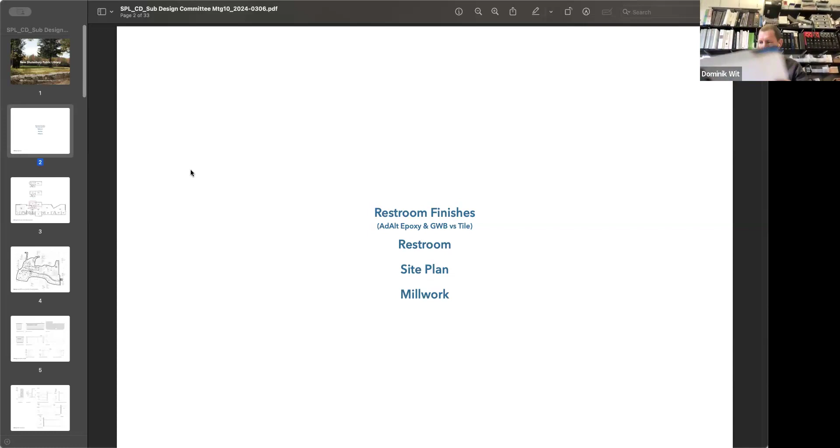Mary Anne, you can come see it in my bathroom. Okay. It'll be a little bit difficult to see, but they've got nice color options. You can do a mosaic.

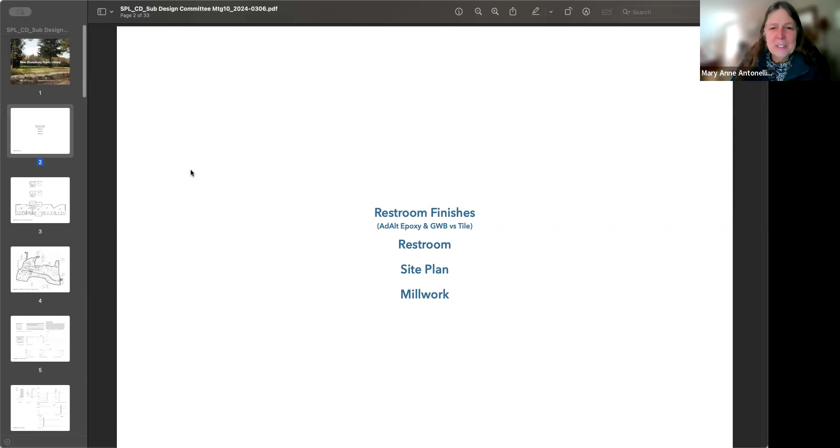We've specified this in our office for many years, and it has always been the most cost-effective tile that we get on the job. So as far as public bid, the Daltile will always be the first choice for any tile sub.

So we stand behind it. I just wonder, for the cost estimate, do we just look at the 75% and have the add alts? We can make our decision then. I think this ties into whether we need another committee meeting prior to the 75%, maybe next week. I had asked for a vote on what the final finish is, but maybe we just wait for the 75%. A few hands have been raised.

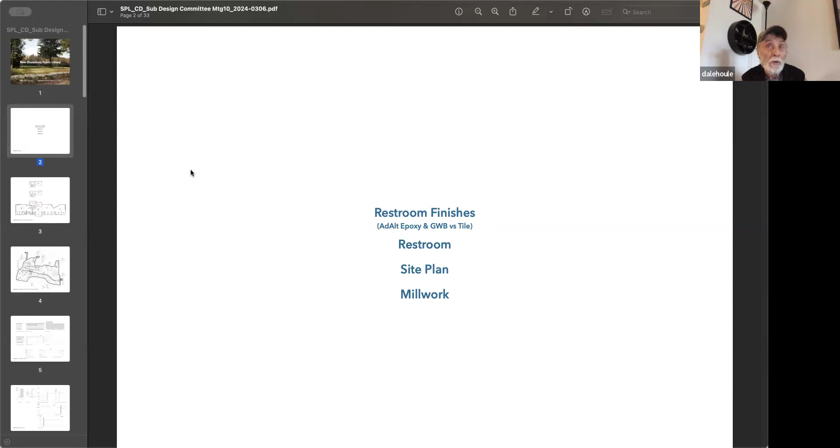I think in order, Dale, you might be first. So I would think that Daltile is sort of a middle ground, and in terms of estimation, the tile approach would be a good middle ground, because you can go up on the tile. I agree, I don't think we really want a bare concrete floor, nor do I think we really want a high grade painted wall, if we can possibly do better.

Penny? What size tile are you specifying? I'm just thinking of grout and how dirty grout gets, especially in bathrooms. Yeah, absolutely. So they have 2x4. My initial sense was to go with 1x1, a true mosaic size. But to your point about grout, you're right, the more grout you have in the floor...

I think it all comes down to cleaning and keeping it clean. We have maintenance issues in town, so I'm thinking of what will look the most presentable over time with minimal maintenance. Does the tile come in a larger size, like a 4x4? Not that I know from our samples, but I'll definitely look into it. My sense is they're smaller format, and as you get into larger sizes you start bridging that middle ground on cost.

Well, I'd go for as large as you can get away with. Okay, so let me look at that. If we use 2x4, I'll ask around the office too about long-term performance. From my knowledge we haven't seen any issues with that, but I think it's a valid question, Penny.

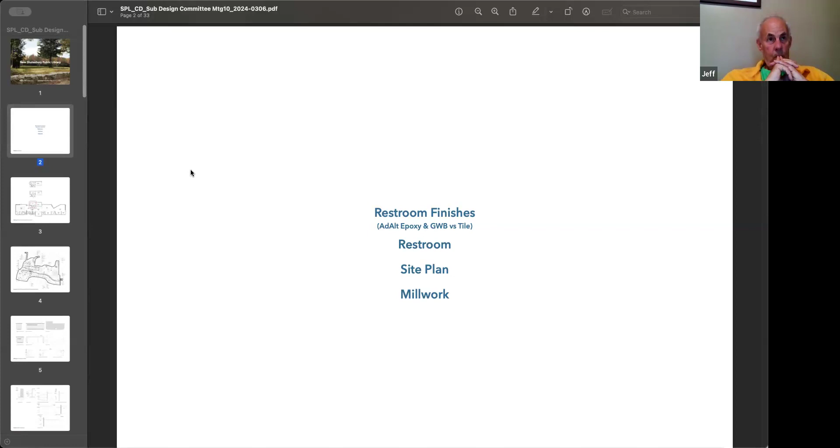I agree with the tile approach. Okay, I think Dale is correct. Yeah, me too, I agree. And just to be clear, have you completely dismissed tile in the entry and circulation area? Because I would still like to see that as an add alt.

I feel like it's something we would be happier with for the long haul, and I have a hard time saving money just for the sake of saving money. I know it's more, and I know my voice here is unpopular, but I prefer not to totally exclude that at this point. I think there's room in the 75% to still leave that door open, and we just reevaluate the numbers.

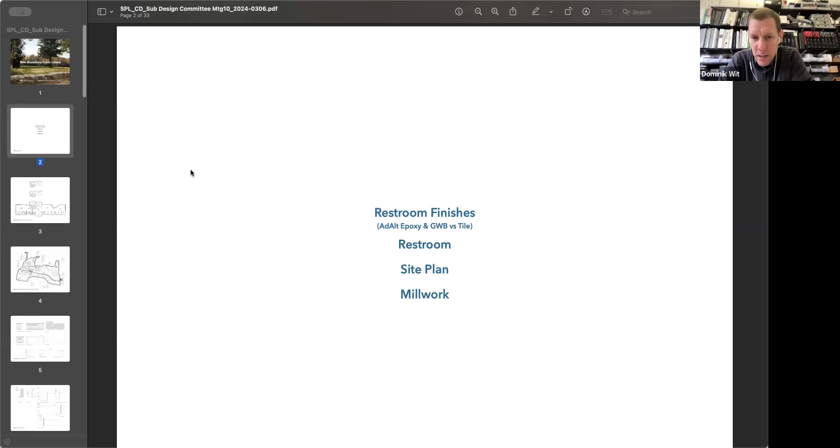I don't know about the high traffic area, where the smaller format is really what we would want to do. So let me do a bit of discussion in our office and see what's best. We'll definitely hold something for that common space that was previously set as tile, and see what we can use for that. Thank you.

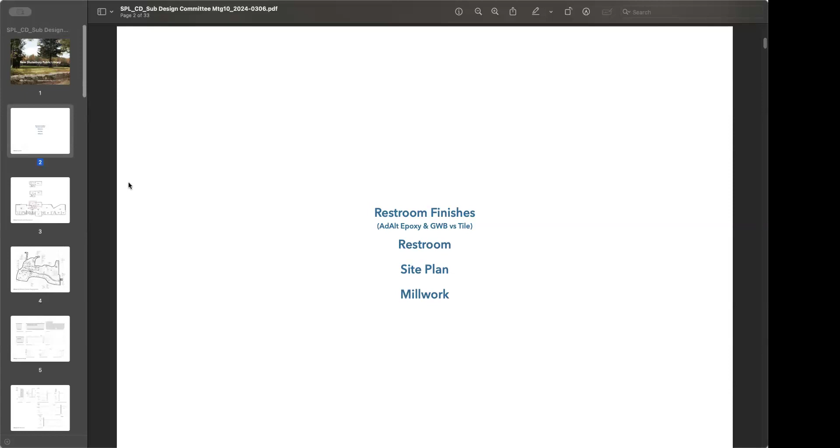So that was just a talking point, I wanted to touch on that. I'd like to update you on the restroom. Last time we spoke, I had an outstanding question with our plumbing engineer as to what we might need for water service square footage to handle a lower flow rate at the well. Originally the plumbing engineer had asked for 25 gallons per hour, and we've dropped that to 0.75 gallons.

Per hour? No, that's not right. I forget that number now, it's not on top of my head. I remember we had reduced that to 0.75 per minute. Yeah, that's what it was. So, 25 gallons per minute, now that I say it, just sounds outrageous. How we ever held on to that, I'm not sure.

So, apologies. The plumbing engineer got back to us, and they are going to have some preliminary containment to be able to store some water in this water service room. That's all to say that at 0.75 gallons per minute, we do not need additional square footage in the water service room, which is great as far as how we lay out this additional restroom.

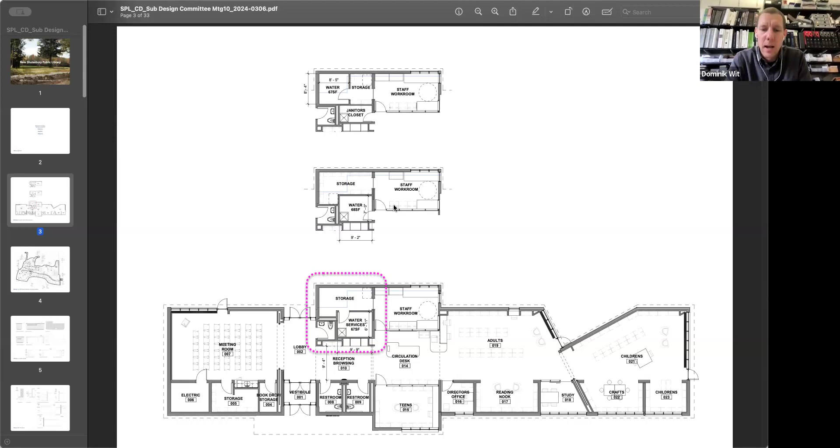With that in mind, these layouts incorporate a roof footprint of 4,999 square feet. So depending on how things go, there's a little bit of fluff in that number, as to where I end up delineating the edge of the upturned roof, or how many inches is the overhang now on the north and south sides of the gabled roof.

We've been in discussions with Garland about all of this, so I'll update you on our strategy for gutters. We're keen to get away from a total gutter strategy. We'd like to reduce the gutters to just where we need them, considering maintenance.

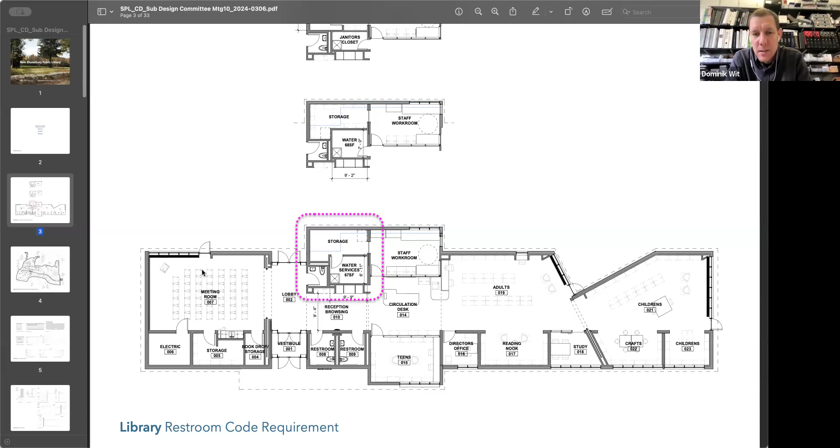But before we get into that, I just wanted to go over again the 3 layouts that we've been contemplating. This first strategy has the restroom with the fixtures nested to the western wall, which was not favored because of the use of this restroom related to the meeting room and potential views into the space.

So there's privacy considerations here, but this could be flipped. Similar to the version above, but it puts the water service room inboard and gives you a nice storage room as shown here. The staff workroom is kept as previously designed. This blue line again was the existing footprint, and you can see the staff workroom layout is the same and it has grown a little bit in area. So I'll go through all 3 and then we can come back to them.

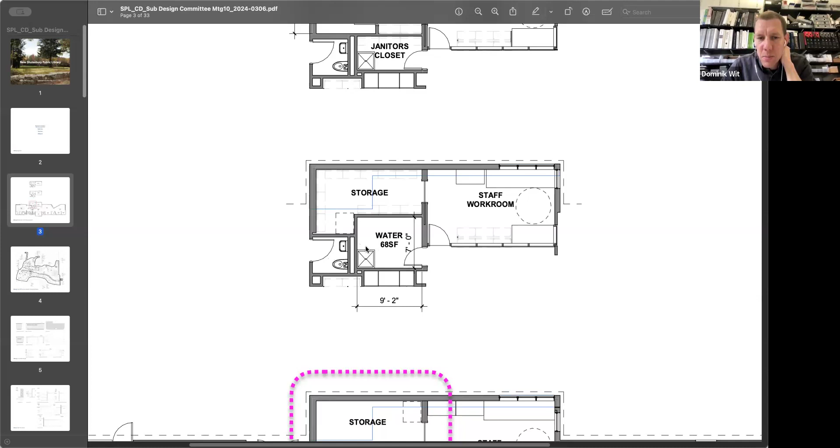Again, this second version is tweaked a little bit. The fixtures are mounted to the northern wall with a wet wall division between water service and the restroom, that allows your mop sink to be hosted here. So it's basically taking this version but flipping that restroom.

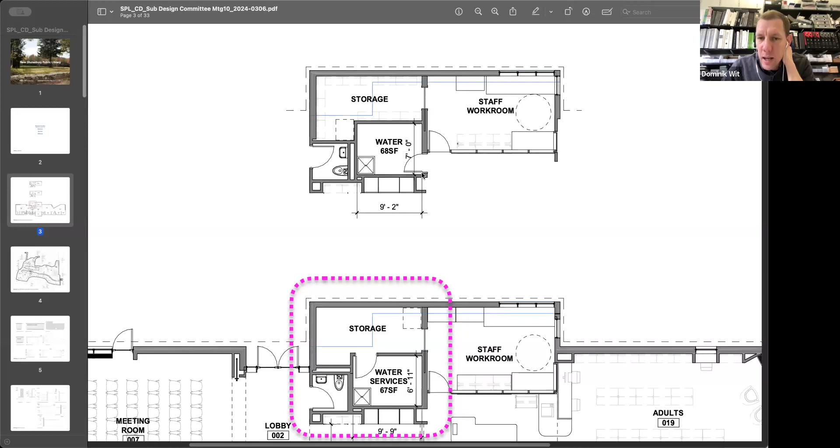Slight dimensional changes here. What we are doing as well is trying to squeeze in direct access into the water service room. So this layout has basically pushed the staff workroom wall and door further west. You can see here, this is a 5-foot ADA radius that we need in this room as a minimum. So we are basically taking this wall and shifting it into the staff workroom.

And that allows us to squeeze a 30-inch wide door into the water service room. I like this as far as direct access to the mop sink. What I'm still trying to get information back from our plumber is, can we have a 30-inch wide door? My sense is we may not, so we're investigating how this scheme could potentially work if we do need a full-width door.

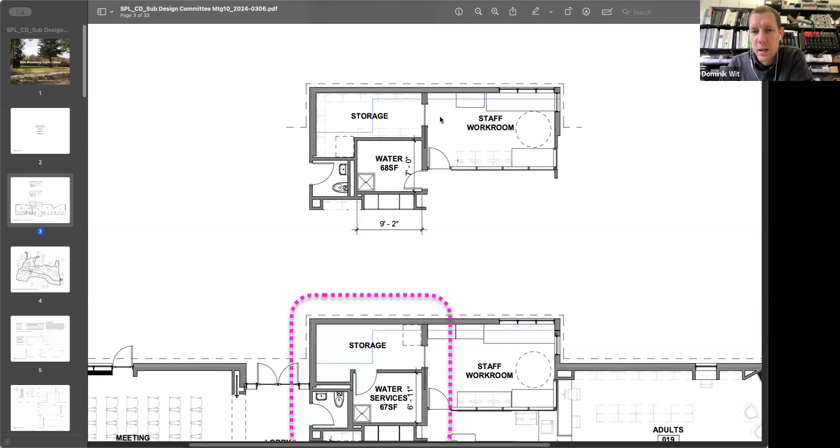What we've done here as well is the pocket door is centered to the storage room so that you can have shelving on both sides to maximize your storage potential. But that now is constraining what you can do for a cabinet. This is a 2-foot deep storage cabinet, which you would only have about 12 to 18 inches here, so it kind of constrains what we're doing. If we had to go this route, we'd still consider how the staff workroom lays out. So that led us to option 3.

If the water service room was to go adjacent to this new restroom, do we divide the storage room into a janitor's closet and additional overflow storage, with the storage room having direct access into the staff workroom? This has a 30-inch wide door going into the janitor closet. It reduces the storage room itself, but you could use the janitor closet for additional storage depending.

The alternative option is that we notch the entry door into the staff workroom so that this door and the glazed wall condition actually turn in. This pushes the door in and allows us to increase the water service room door, returning it to a 36-inch door width. This door could push in, and we can consider how the staff workroom lays out. So that's kind of where we stand at the moment.

Heather, I see you have your hand up.

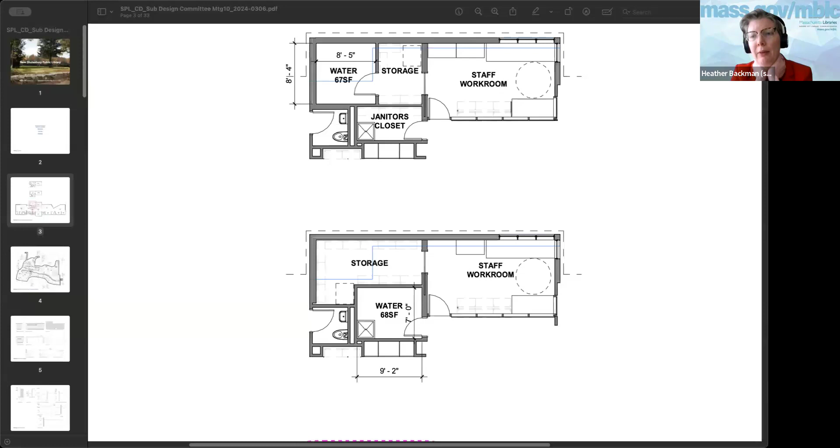Thank you for all your work thinking and rethinking this, it's a lot of moving parts. I think the middle option is the best one if you can get it to work. I do have concerns about the top option and the amount of storage lost there functionally. Maybe some shelves could go in the janitor's closet, but from having worked in libraries, that's not going to be a functional solution in terms of really using that space. If we can stay away from options that reduce the storage closet to that extent, that would probably benefit library staff in the long run.

That makes sense. As you say that, Heather, I wanted to show you this—somehow it wasn't representing in my presentation what I'd hoped to show for option 2 that you favored. This incorporates pushing the entry door into the staff workroom. If we could make this work here, that looks much better. It looks like all you're losing is potentially just walkway space, not necessarily losing functional staff workroom space.

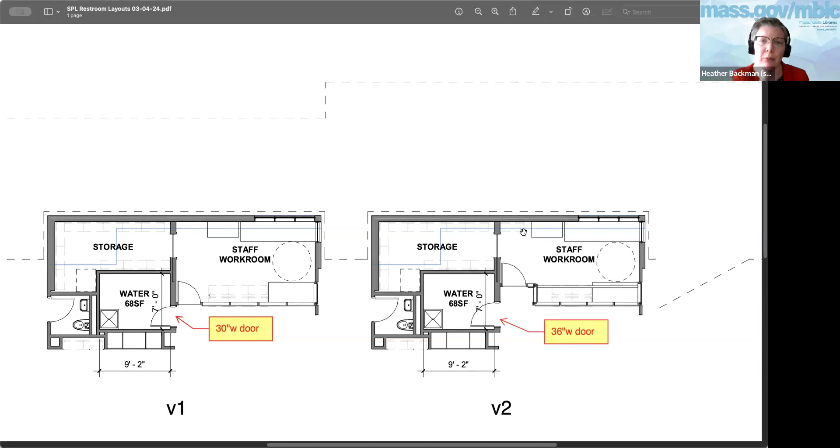That's right. It depends on the fact that we are not going to own the scope of this storage cabinet closet, so it's going to be a standalone FF&E component, something the library procures. What is available at this depth has to be considered, and we'd like to incorporate that thinking into how this might resolve.

But also, I think the other component here is we need 40 inches clear from this wall for ADA, right? So that meant this glazed portion of the wall needs to push into what we already had as shelving. This was 9 feet of shelving, and I think that would be reduced here if we incorporate that.

So a small reduction, I think, for you, Marianne—this is double-sided. To the circulation space, you have holds, and staff circulation storage. Your holds is actually here, but then in your staff workroom you have dedicated shelving. This is counter height, so about 30 inches of metal shelving in here. This one has the best potential, I think.

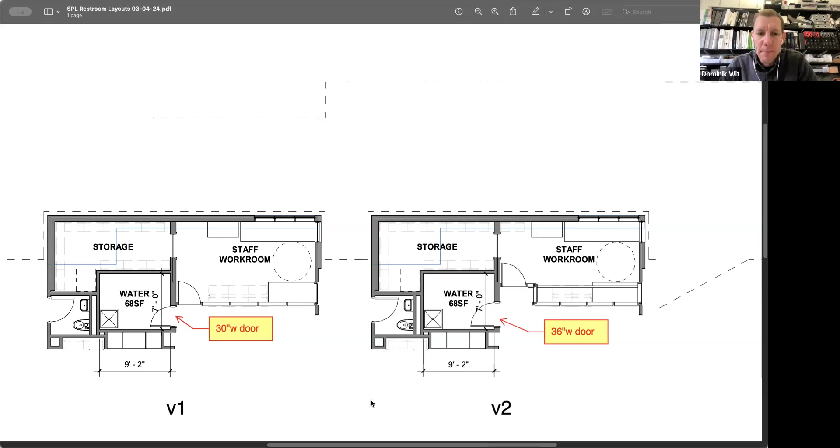So a quick sense from the group as to whether version 2 of option 2 seems to be the best strategy, depending on whether we can get away with a 30-inch door width. That would be great, I think it's just cleaner.

Practically speaking, based on my experience, the 30-inch door would work unless there's some equipment going into that room that wouldn't fit in or out. But in terms of basic operations, getting to the mop sink and doing all those functions, I think that's good, because no matter what, the right-hand option is going to cost more money. As soon as you put those two corners in there, that's going to cost more.

So if there's some reason we can't work with a 30-inch door, we'd have to factor that in. But if we can, in terms of cost for the 75%, I'd suggest you go with the V1 option.

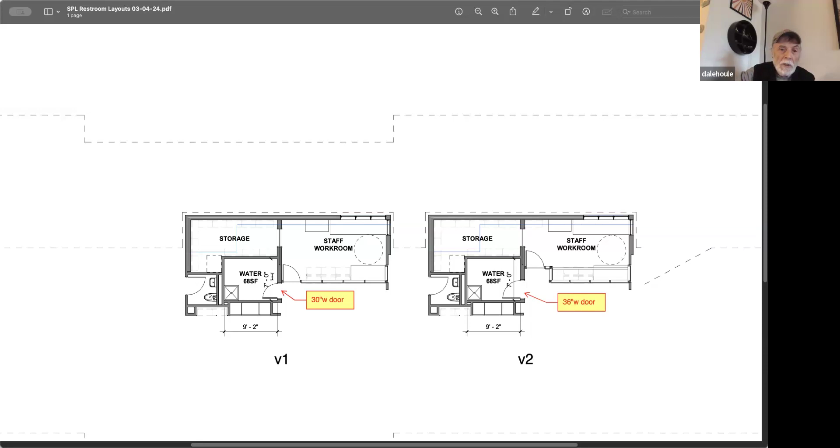Understood, thanks. Marianne, what is the dimension of that little cabinet space, the width? I think this is at least 8 feet for the whole width. So is the little rectangle you drew 4 feet? Yes.

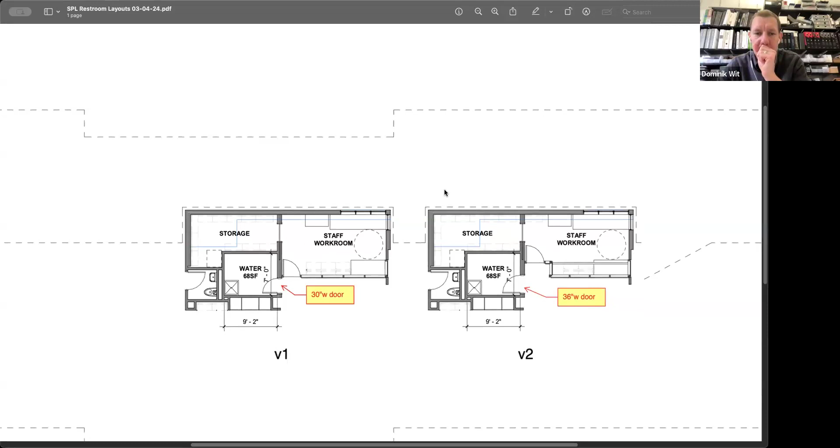Okay, can you show the one that's in the plan? Can you put that up on the screen one more time? Down lower. Okay.

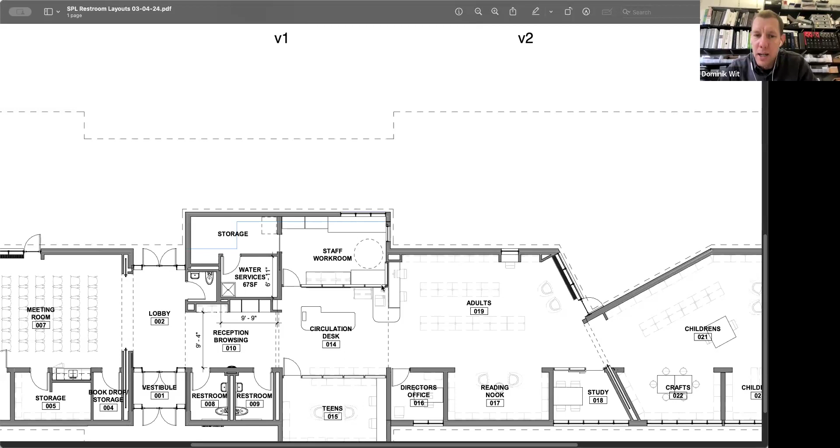I think as well, which I'm not representing in this version 1 or 2, is that if this wall and all of this assembly moves in, you actually open up some space here. And the question is, do we pull the circ desk in a little bit? There's quite a pinch point here. But it does open this up a little for you as well, and maybe this printer station can extend a little more too. So it would require a little fine tuning once we get there. Right now we're at somewhat of a placeholder.

I think if we use this as a placeholder for now until March 15th, whenever we're testing, it might actually be after our 75%, but we'll have some time before we go to the 100 to tweak these things. As far as structure and the building footprint are concerned, we're holding to this.

Okay, good. Alright. I think if V1 can work, that looks about the best. And if V1 doesn't work, I think V2 will work.

You have that line drawn in V2 from right there, and that's not in the other one. That's an error on our part, that was a quick output. That's a part of the model that moved across with that move. It needs to be cleaned up because it makes the room look a lot smaller. It does, yeah.

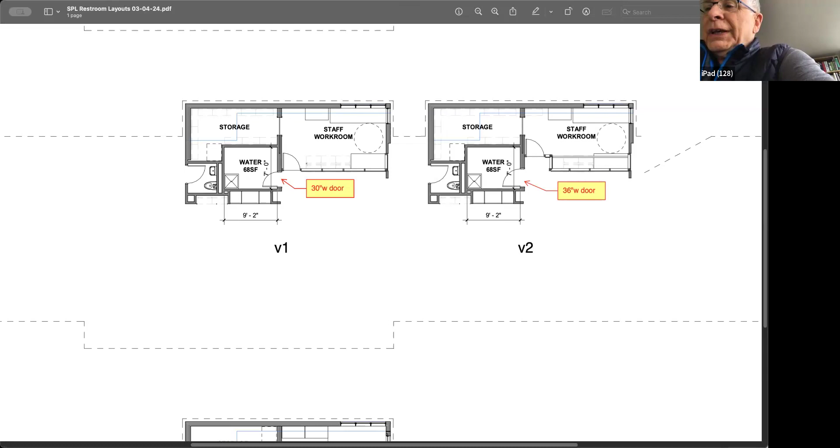Because I was thinking, if the yield is adequate, I'm thinking you need your pressure tank, and then I would assume we're going to end up having to have a PFAS filter, because neighboring wells currently have them or need them. The highway department across the street has one, and houses to the east on Pelham Hill Road have them. So we would need the PFAS filter as well as a pressure tank, which together don't take up a whole lot of footprint. So I was wondering if that's all we need, do we even need that much space?

We do, and I think the mop sink is obviously taking up square footage too. The pressure tanks we are already accounting for in this square footage, so we have that. If you have a look at the DD set of the water service room, you see a layout of the equipment. The thing that needs to be considered is the maintenance clearances for these items, and that has a bearing on the resulting square footage.

The PFAS, I think we should account for in next week's pricing set. Just get that square footage accounted for in this water service, considering neighboring properties need it. For some reason, if we don't, we can just give that square footage back over to storage room. I agree with that, yeah.

We should then also include it in the cost estimate and just have it, and again we know where we stand.

Andrea, I see your hand up. Thank you, and I apologize, I was on 128, so I have a couple of comments that I didn't want to hop in on and have all of the highway noise in the back. So starting with this, I just want to make sure a 30-inch wide door would satisfy a wheelchair if needed.

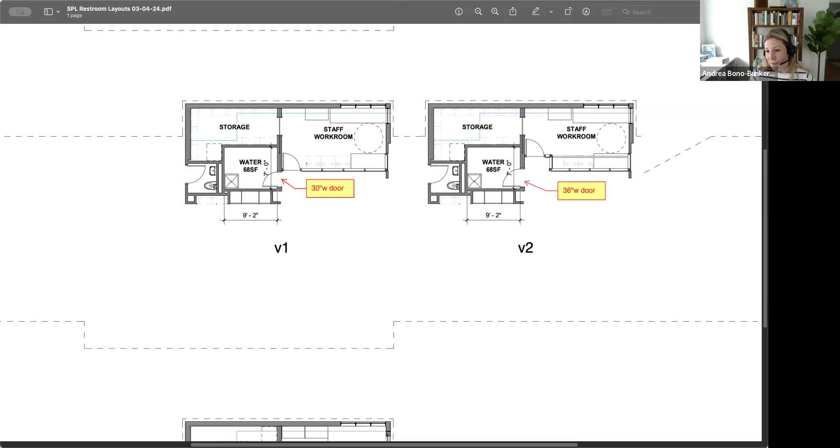And then also when you're thinking about the costs, I just want to put a reminder out there that this is a pilot project for us that is supposed to be the most economical as it possibly can be, because what we're trying to do is prove that this can be done for small communities like yours. So I understand that there are some aesthetic choices that we are not part of, but I just wanted to remind everyone about that when you're making these decisions, how replicable is this for other libraries that are similar. So thank you. Great, thanks, Andrea.

So I think there's small tweaks to this layout that I will go ahead and do and include in the 75%, and that way we have it. As far as decision making with regards to this, I'll focus on V1 and see how things lay out, but potentially V2 if needed, so I'll keep you in the loop as how things go.

Marianne, this storage cabinet, I think I need to consider as well as how this ends up resolving, so we can coordinate on that. Yeah.

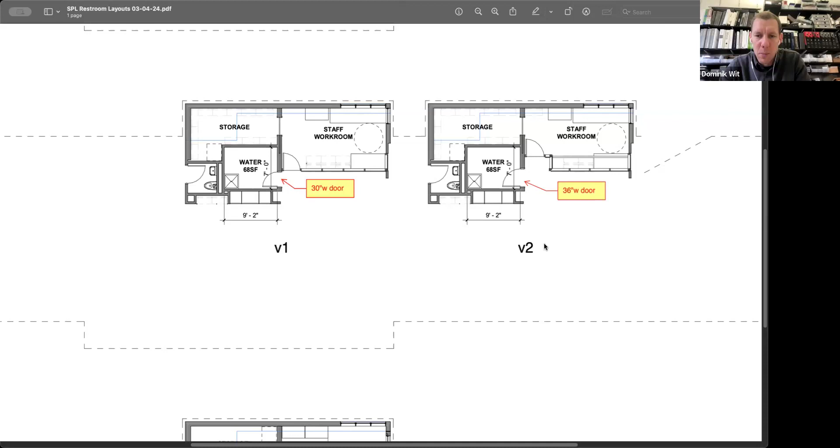That was the interior. Paula, I don't know if she's on the call actually, but she had quickly outputted some views for us.

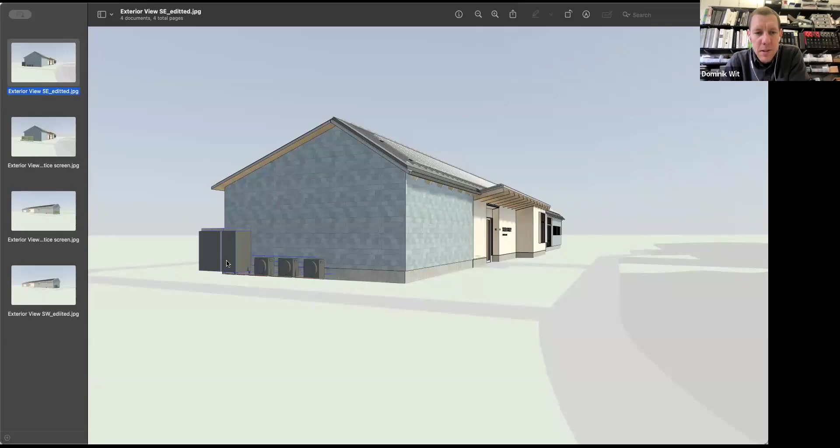So this is a view of the southeast corner of the building. And what I wanted to show here was the mechanical equipment. This is now the meeting room and the electrical room. This is the condensing units and all the mechanical equipment that we're housing to the south of this building.

The refrigerant lines have been coordinated so that they enter the building down low here at the water table, and they're not going to fasten to the slate at all.

Yes, this equipment is fairly visible, right? They're fairly large, this one here stands over 6 feet, it's like 6 foot and some inches. The refrigerant lines would be behind them, and they would be sitting on a 5 foot wide concrete pad. This location right here where my cursor is is about where the meeting room door was. So you can see here from the roof ridge, it's right around there, so it takes up that space.

This wall is going to have other electrical panel boxes. We've got the solar equipment, there's also the roll-up generator access point here. So there's some equipment here that we haven't shown, but we need that clear space in front.

But we do have about 4 feet of garden bed before we get to this pathway, so we were considering how we handle that visually. There's a potential to screen that. We were talking with Stimson as to whether we use a lattice and have vines to create a natural screen element, which I think would be nice, and then you would have what we already own for shrubs in the foreground. It's a question to you as to whether we own that screen in the base bid, or whether this is something the library would like to take on after the fact.

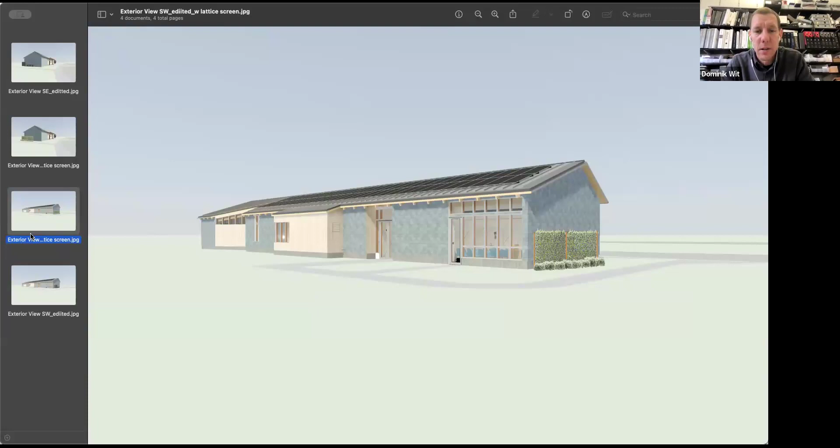But again, that might be something the library is happy to take on. This is a southwest view, and again, so you saw the screen element there, and this is what you would see.

So it's a question about how you are considering programming this space. It's not the most beautiful thing to look at, and it's not the first thing you see as you enter the library either. You wouldn't see it exiting to the west and using this portion of the site. It's only when you come around to the south that you see these.

I saw a few hands up. I see, Andrea, you're on top of my list. Thank you, yeah, so just a few questions.

So one is for maintenance and upkeep purposes. Shutesbury gets a little bit more snow than a lot of us. For removing snow around these units, would the screening impede that at all? Would it allow people to be able to get in there and work on the equipment? And does it cause any impediments to service or maintenance, I guess, is the first question.

Yeah, that's a good question. I'm still waiting to hear back from our mechanical engineer on that, so I haven't got a good answer. My sense is that we would make sure that is feasible for all of that equipment.

And the other question I have is, they are quieter units, but they're not completely quiet, and you have it next to the meeting room. So I just didn't know if there were any considerations there for how to mitigate noise transfer between that unit and the great meeting room.

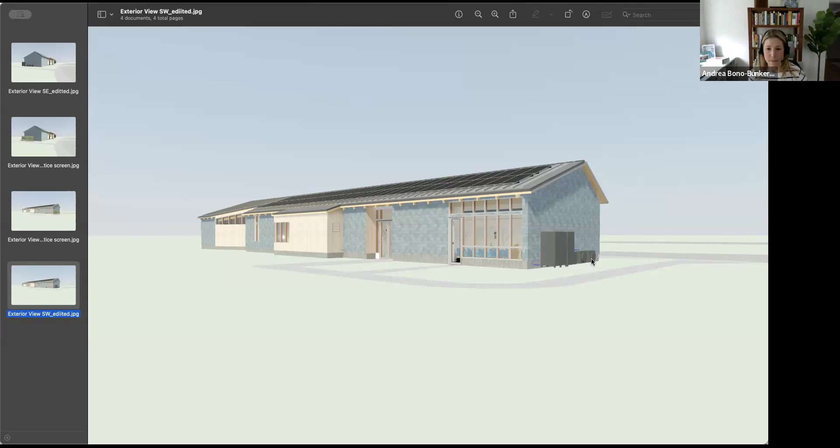So I guess I would be concerned about any panels, just simply because of the high winds that we've been having. So I'm thinking that maybe for the 75% cost run up that we maybe don't include any panels, because I think they would require maybe just a little bit more than simple engineering.

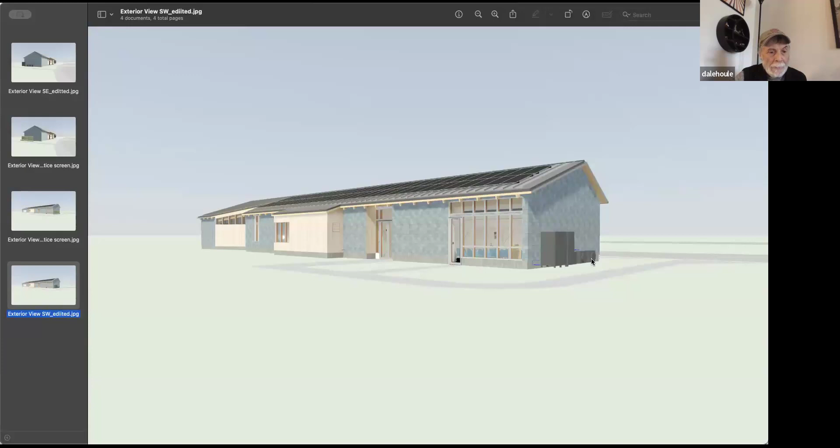Yeah, and that's where my sense was. It's a good point, Dale, that we would want to involve a footing, and make sure that our post is sound and that the lattice can hold up to storms. So we would tend to make sure this is adequately engineered to a degree, right?

I think it should be considered like a fence post. Get a decent footing in there with a solid post and allow the lattice to be attached to that. So, yeah. Penny?

Remind me, I know you mentioned this, what is the distance between the units and the pathway planted? Yeah, so it's a 9-foot span between the edge of wall and the side of the sidewalk here. The concrete pad is 5 feet of that, and then I think it runs 20 feet along the building. So you would have a 4-foot bed.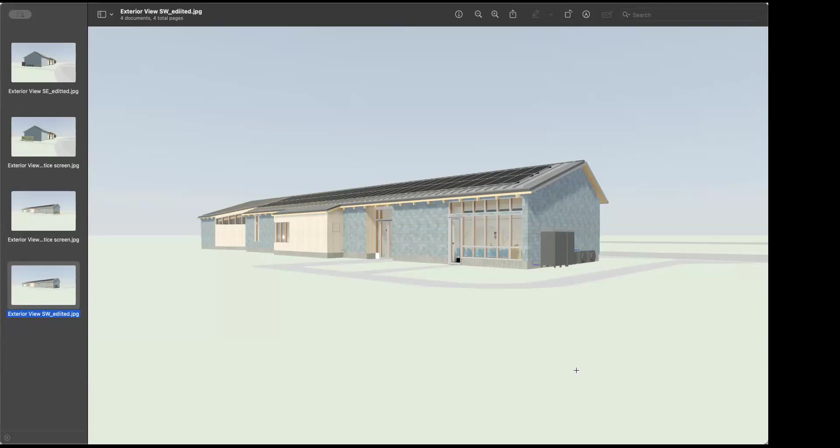So I would vote for just putting shrubs there, just putting plantings. I think that would be simpler and less expensive. And we all know what those things look like. And as Marianne said in some earlier meeting, it's just what we see now. And we celebrate them. Well, we tolerate them. We know they're good, even though they're not beautiful, but it's just what it is. So I think an assortment of well-placed shrubs that are sized so that they won't grow too close to the equipment is the way to go.

Yeah, that's a good point, Penny. That was my first thought, and I was talking to Stimson about what species we could use. The question is, how much of this equipment do we want to screen? Because these 2 units here are over 6 foot. So is 4 foot of ground space enough to contain a shrub that can grow tall enough to effectively screen it over time?

So we're not going to, and maybe it won't, and maybe it won't screen it completely. And I think that is okay. Got it. Yeah, perfect.

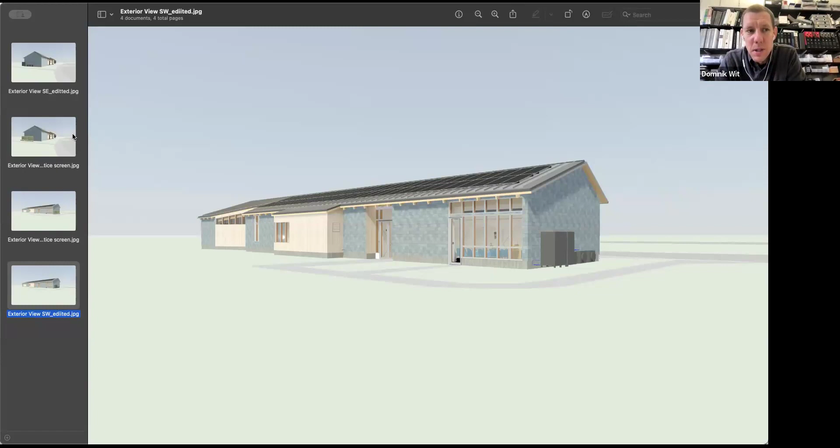So I'm happy to go. That's kind of where we are right now, actually. And Stimson owns the plantings for that bed, which is a small shrub.

We just don't hold the screen. I know this had been a topic we never got back to you on, and I wanted to make sure you all understand where we are. We've been working hard with our mechanical engineers to lay this out and make sure the refrigerant lines are as discreet as possible. It will also involve a small furred-out condition in the meeting room to allow for this refrigerant line. They actually need to enter the electrical room high, per code, because they're going to use the plenum space to connect with the equipment. So they'll route up inside this exterior wall and turn into the plenum space up high. They need to be 14 and a half feet above finished floor in the electrical room, then serve the mechanical equipment throughout. So a little bit of gymnastics, but a much cheaper option than having this in a duct bank below grade.

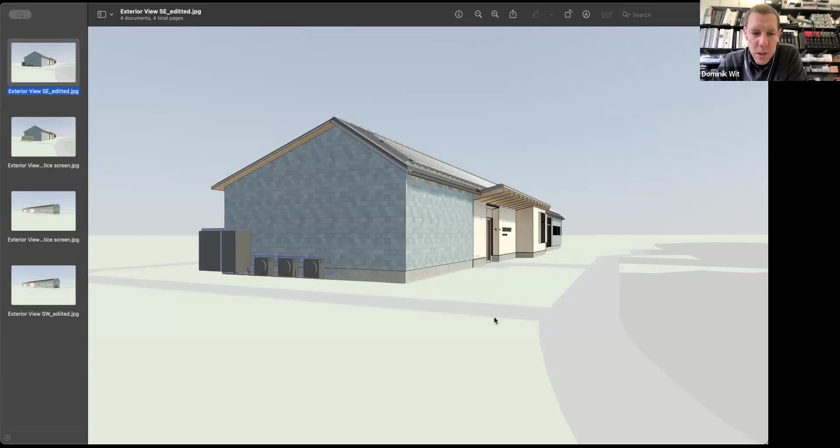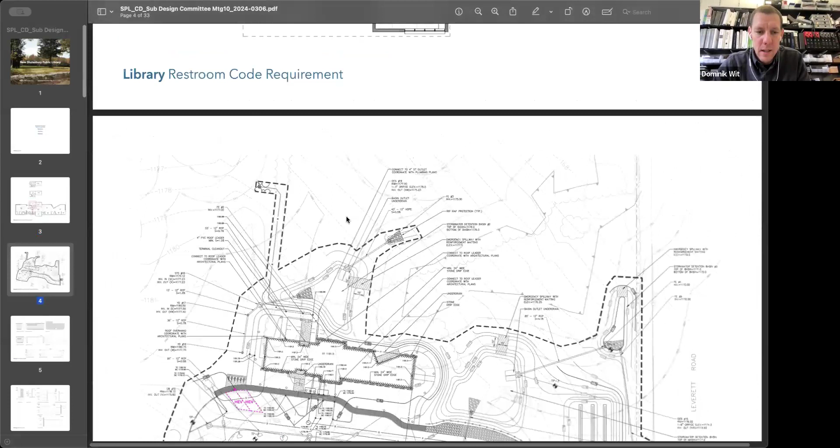So excuse the jumping around, I'll go back to the presentation. So, the site plan - I just wanted to update you. Again, a lot of coordination going on. This is the updated site plan.

Related to this, we have the NOI amendment being submitted to Conservation Commission. We're pleased to say the stormwater report did not need to be revised. The revision to slightly reorient this parking lot turnaround, so that we meet setback requirements to the neighboring property, has not altered the way stormwater is handled on site. So basically the system is operating as previously submitted to Conservation Commission. That was great news.

I wanted to mention that we do need a raised element on the boundary here, the full length of this entry drive. So we're holding on to Cape Cod berm. This is required to allow the stormwater collected on site in these locations to be controlled and make its way back to the drainage system. So we're holding that as Cape Cod berm.

I'm also coordinating with Stimson. I've asked them that we continue the Cape Cod berm condition - we need that raised element here as well. Initially we had precast concrete curb, but as a cost savings measure, I think this should go to Cape Cod as well. So just the concrete footpath has concrete curb, which is appropriate.

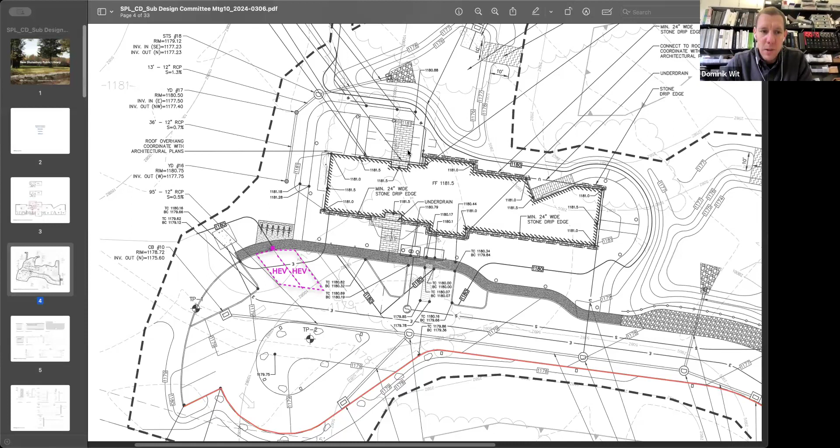If we don't have any other questions, I have millwork updates.

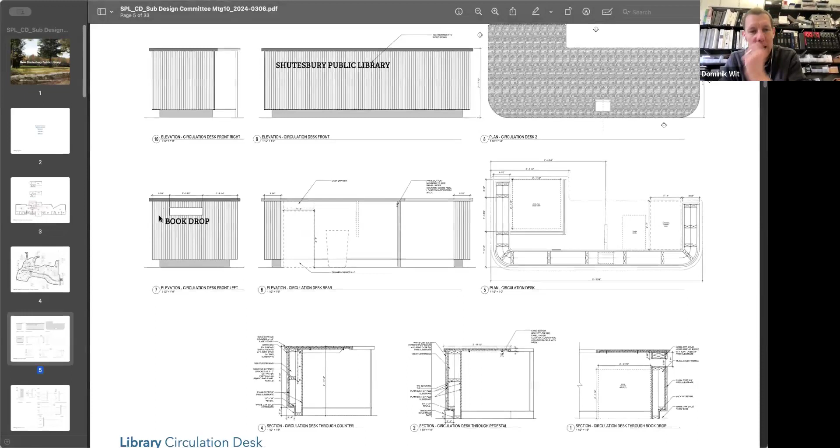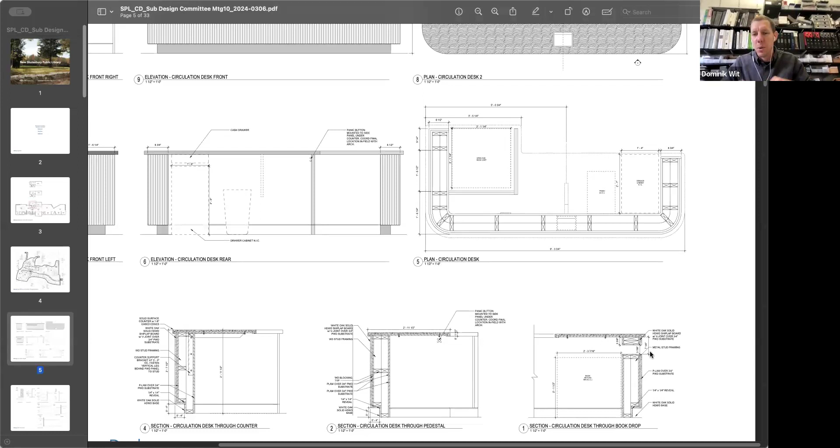Andrea, I wanted to let you know, before I get into the section, we are now incorporating a book drop slot. Thank you - it's still on the south side here, now underneath the counter. We were able to incorporate that so it still meets the requirements, so it can slip into a book drop cart. This is the first time we've detailed it like this, as a flat slot, meaning patrons need to push the book in before it drops, instead of letting it go in a chute condition. I think this works fine, and I agree, this is a cleaner resolution now of the counter. So we were able to fit that in.

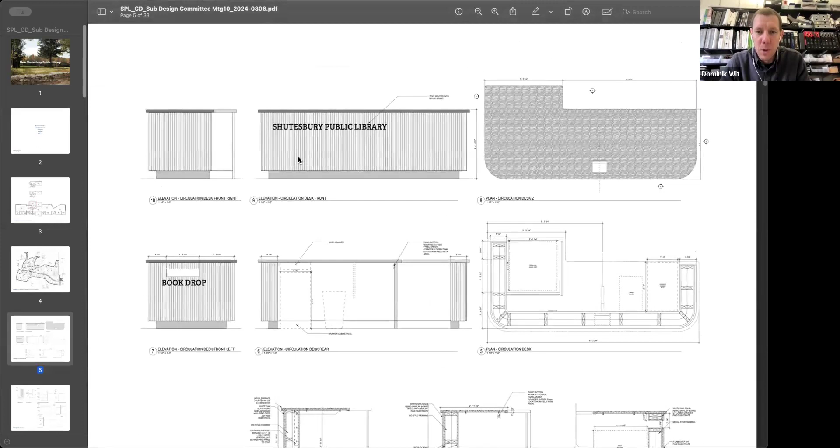We've been working with Mary Anne on the programming of this, and we've made some slight updates here.

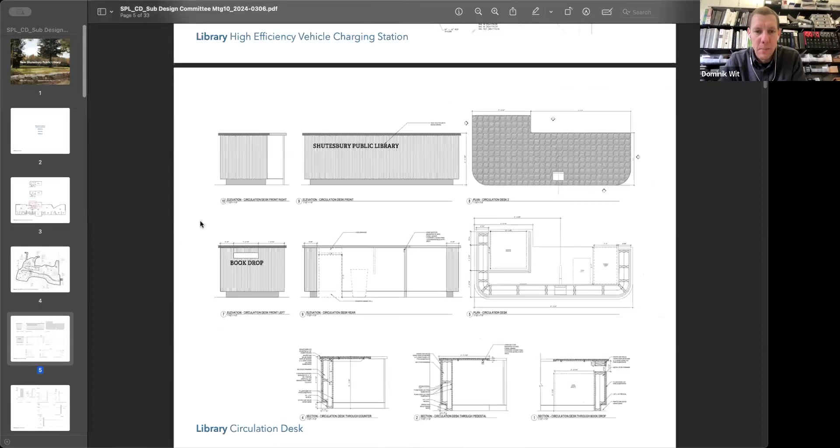A cash drawer, and we're reusing some below-counter box files. So there's some efficiency that we've been able to achieve, a slight reduction in scope here, which is good.

I just wanted to bring up the— oh, Penny, I see your hand up. Penny, are you muted?

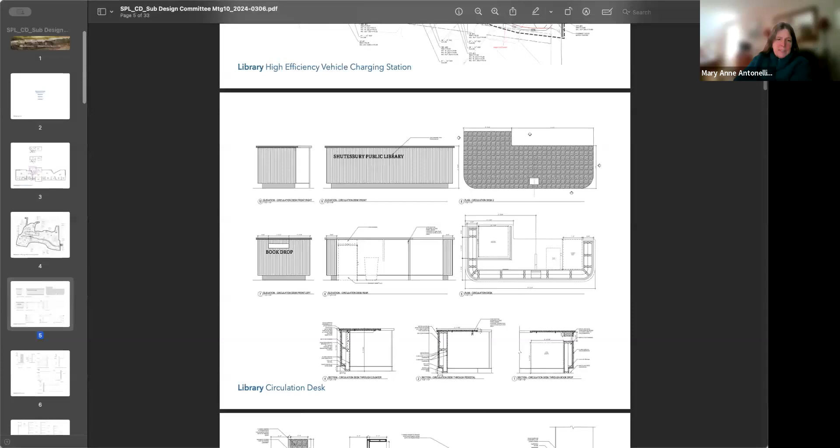Sorry, Dominik, I don't really have a sense of what the circulation desk is going to look like. So what kind of wood are you talking about, and what kind of styling? And I don't think it needs to say Shutesbury Public Library if that saves some money.

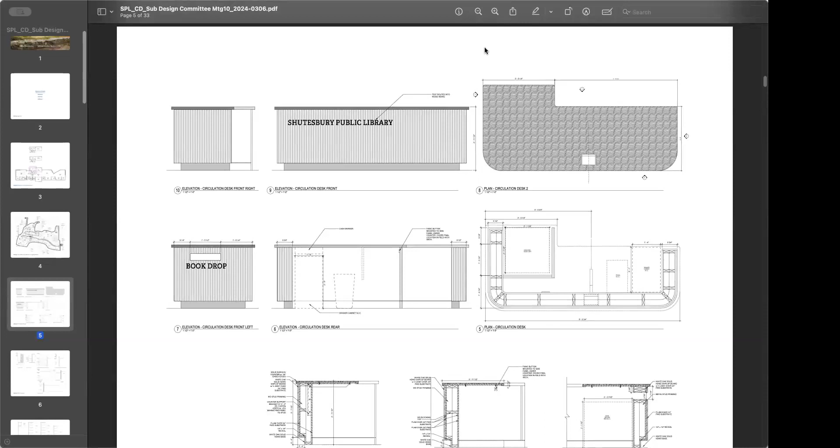We usually like to incorporate some signage, we typically do. So that's a question for the group, and we're happy to remove that if desired.

So it's going to be a solid surface countertop, which is very hard wearing. Color choices for all of this is something we can go over during the shop review. So we kind of own the product, and then the final color selections we can coordinate with where we end up with floor finishes and paint colors. It's a great hard wearing surface that we typically use for our circulation desks.

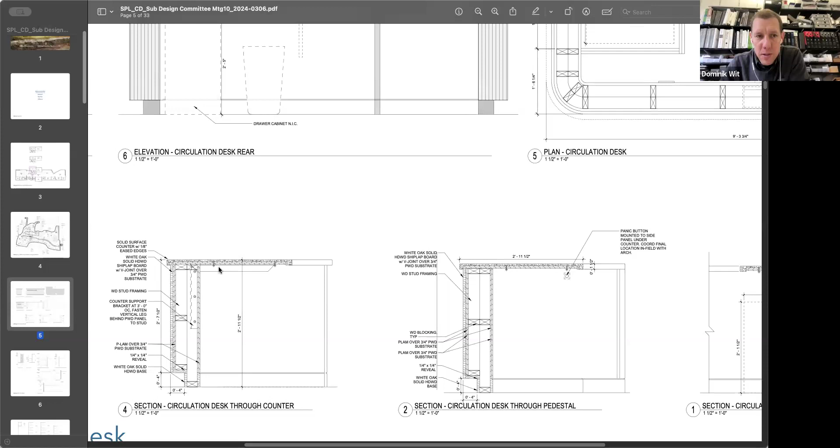We have white oak, solid hardwood shiplap boards. So there's going to be an expression of this vertical board. The shiplap will have a small reveal. The way that the two boards connect, there's a small resulting reveal, which will give you this vertical language that'll wrap around.

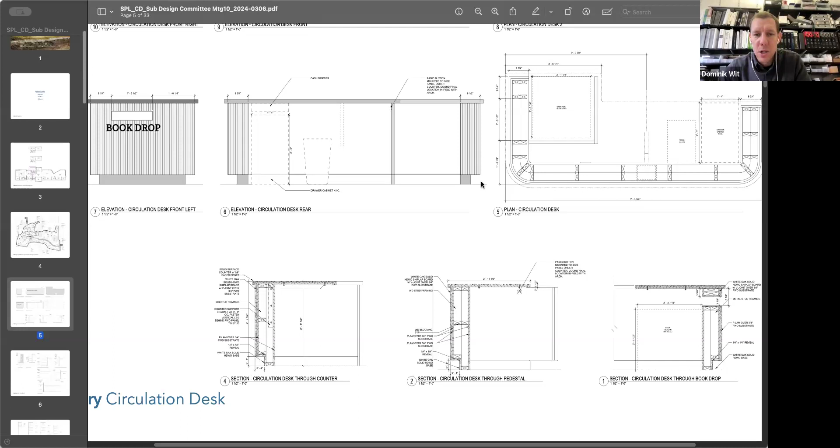And then we have a hardwood base condition that's kind of standard. It's open to the back. So it's really forward-facing with the finishes, and the back is open and more utilitarian.

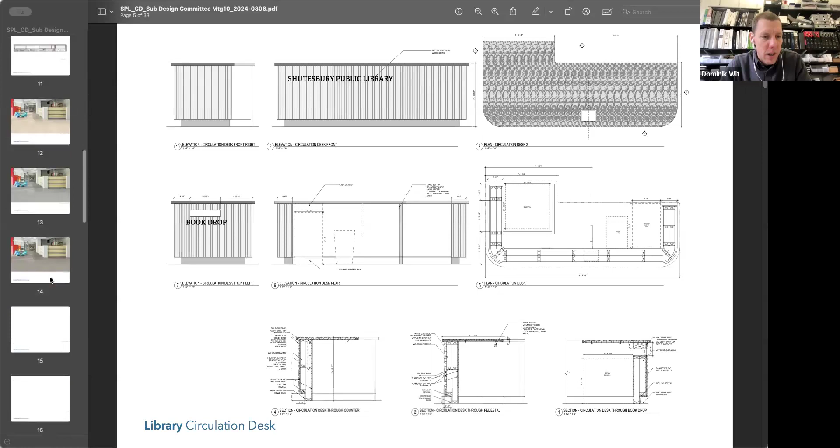Thank you. Yeah, we represented this in one of our previous renderings. I have some slides that I just hold onto to kind of show it.

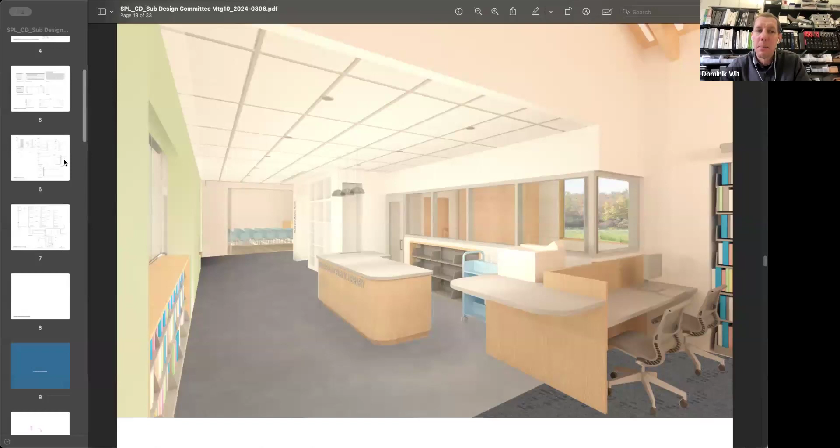I can share some imagery of similar specifications that we've built. I'd be happy to share those as well. Oh, that would be nice at a later meeting. Thanks, yeah, some examples.

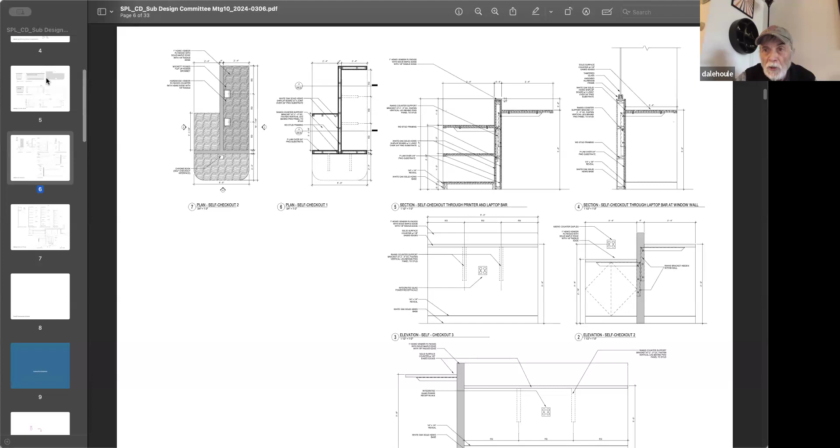So Dominik, I think it's fair to say that this is a pretty massive circulation desk, and it's not going to be moved. In other words, we really want to get the location really right, because there's no shifting this thing around once it's in, I would assume, correct?

Correct, it will not be fastened to the floor. But I'm trying to think—I have to go back to some of the shop drawings of past projects as to how it is modularized on the install. My sense is that the counter itself, there may be a seam somewhere. I have to go back, Dale. I forget whether—I know we've built some larger desks that were modularized, and I'm trying to think of the parameters as to the shipping of this and the installation.

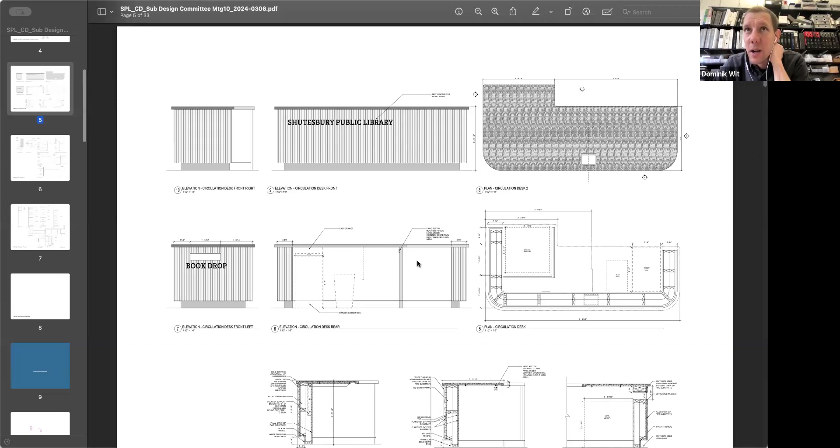Obviously, it's going to be very heavy in one piece. My sense is that all the base components will be modularized, and there'll be some kind of connections however the millworker decides to install this. I'm not sure at the top of my head how the counter will be considered. The intent, though, is that it's not fastened to the floor, to allow for future flexibility, that it can be moved. So however it's constructed and put in place, if there's some sort of a joint in the counter, that's going to have to be disconnected and reassembled if we need to move this.

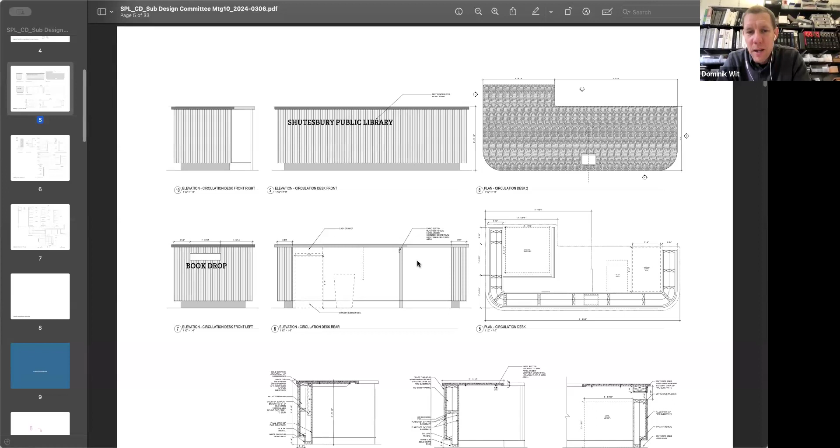But the intent is that there's flexibility here, and in the future, you're able to move it, shift it, replace it very easily. We didn't want to design it with any casters or any way of moving this around easily, but it's kind of a monolith. The intent is it's this monolithic item that can be moved if needed. But yes, it's going to be very heavy, and I'm not sure on the manpower it would take to shift this if it were a single piece. Yeah, thank you.

Moving to the self-checkout printer and adults computer station. We've been coordinating with Marianne about how this all works. We have pop-up flip grommets so that you have power at the tabletop, so you don't need to fish any cords down to an outlet below. The self-checkout will have a through-counter grommet to an outlet below, so this is a one-install function where you're not going to need to plug in and unplug.

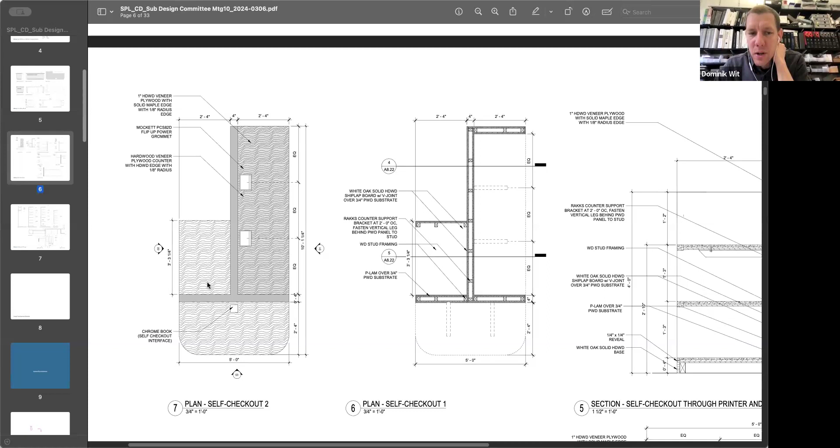This has been revised. We've also dropped the counter at the print station to allow the printer to sit down a little further, so it's not obscuring the view across the top. So you can see some details here.

I think I'll go straight to an elevation, sorry, as I'm zooming around here. I have an elevation here. This is the self-checkout zone. There's this section, and this will be the printer station.

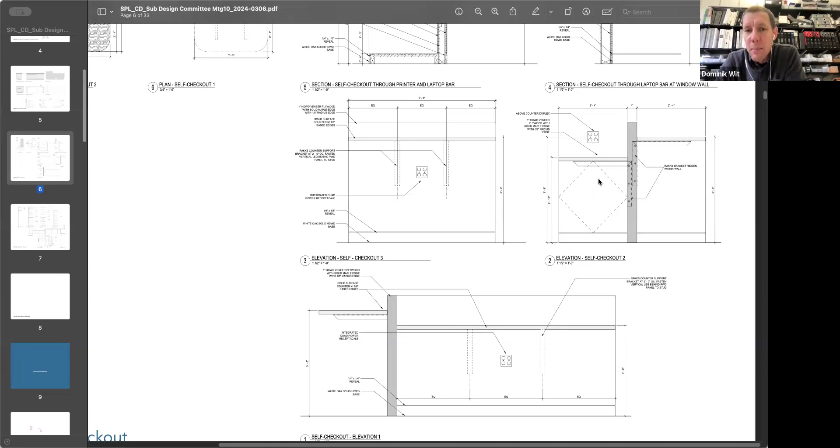So we figured, Marianne, on keeping the outlet up high above the counter, because below you're going to have cabinet doors. Previously we had this open with shelving just to stow away printer material, printer paper, things like that. We figured we'd include two doors just to conceal that. The outlet could go in a few different locations.

We thought we'd incorporate it here. So if I go back to the plan, the printer's going to sit here, and we would have an integrated outlet here that's above the counter.

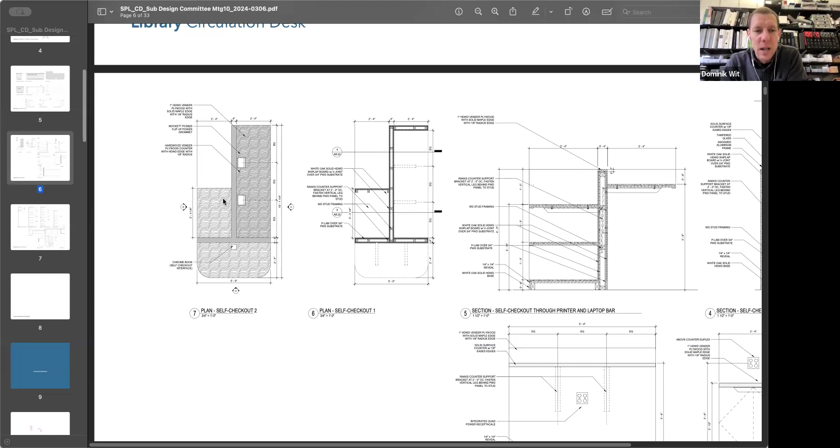We could potentially put that on this wall, which is the staff workroom. I just thought that once the printer's in place, you can do localized wire management, plug it in, and have it carefully tucked away there.

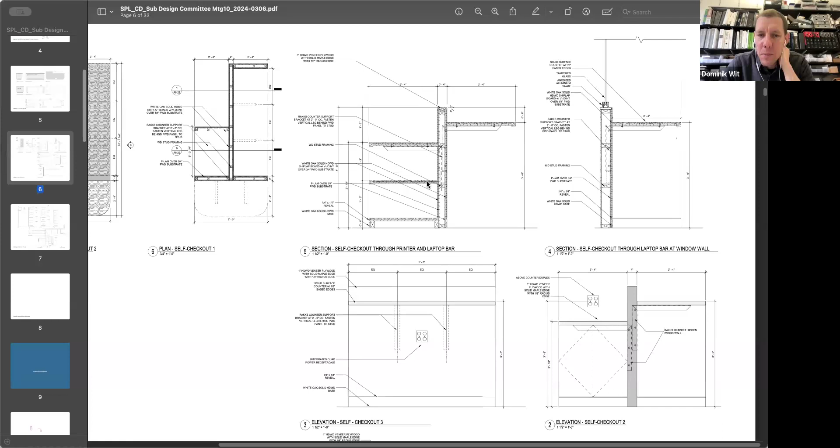I figured you wouldn't want the outlet below the cabinet because that would complicate how you store underneath there. We'd set a couple of drawers in there as well. This section still needs to be updated to show the doors, and this would be two adjustable shelving units that you can have in there. Heather?

Yeah, could you scroll back down to elevation 3, I think it is. Just go down the screen a little bit. This one here? Nope, keep going. Oh, I'm sorry, the one that kind of shows this sitting at the public computers, looking towards circulation.

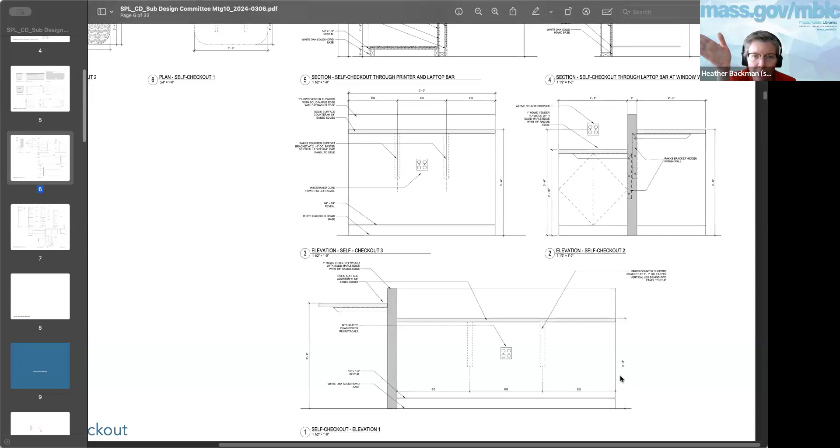Correct. Okay, and those dotted vertical lines there, those are braces for the countertop? That's correct, the rakks brackets. Yep. Okay, but I was trying to figure out, are those projecting out underneath the countertop at leg height, or are they coming straight out just at counter height?

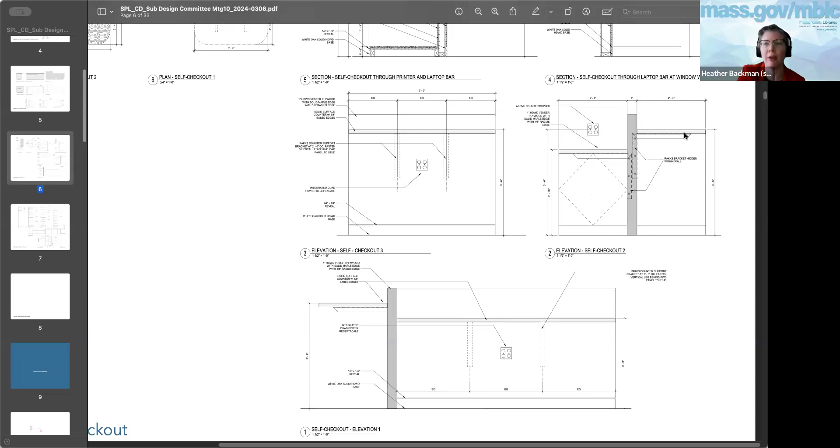Okay, great, then my concern is unfounded. Thank you. No problem. I think they're about 2.5 to 3 inches deep, something like that. The rakks brackets, we've used them a lot. They're great, you can conceal them at the back, which is nice. So they're a great support system for these counters.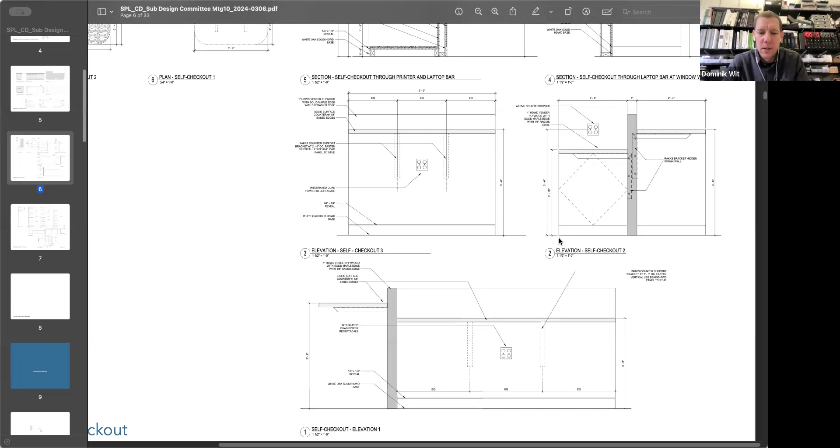So a quick update on this self-checkout, and lastly, the library of things. I don't believe there was anything really new to present here, just that we had made a lot of revisions considering the size of a life vest itself on a hanger.

Spatially, how does that lay out? And allowing the flexibility for on-season, off-season. Off-season, the shelves come back into play, they're adjustable, and the rods can be taken out. The rods are supported by these brackets that are on either side of the shelving.

Again, if I zoom in here in the elevation, I think it's maybe a little easier to orient. So looking at the library of things here, the paddles would fit in this more slender portion of this unitized system. And then we have two cavities with a fixed-in-place vertical element and a fixed-in-place horizontal element, and the rest is adjustable shelving.

So you have adjustable shelving here for the telescope, cooktop. I think we have enough clearance here to set them down, put them in the shelves, and take them out. Adjustable shelving here for the library stuff, or for any of the items you want to display here. Adjustable shelving in these two bays.

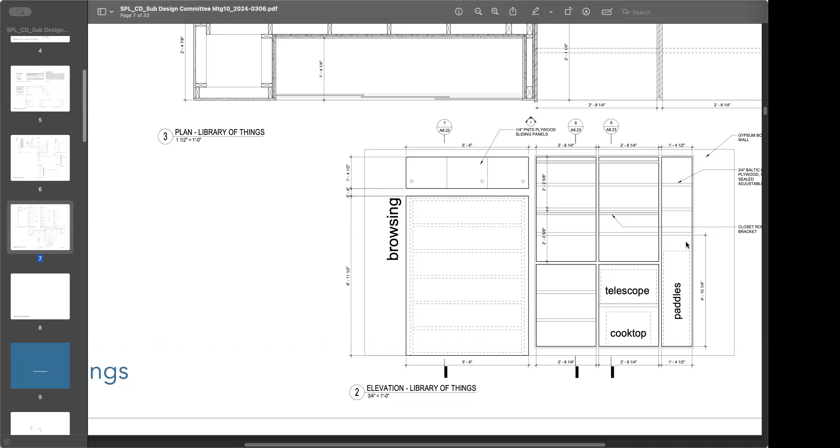Will there be shelving in the paddles spot for the 6 months of the year? There are no paddles in there? Yeah, that's missing from this elevation. The intent is that we would include that as well, so it would be full height adjustable shelving. That's right. The other thing we didn't previously show was the holds.

If you're looking in plan at the browsing and library of things, as you turn around the corner and slip past the circulation desk, which is to the right, and then before you enter the staff workroom to the left, you can see it here in this plan cut. We have a small recess for holds, and we elevated that, so that would be the same adjustable shelving you can see in this section.

We can look at what height you would want for holds. Our thought was we wouldn't go any higher than 7 feet, even though the library of things is using the full height, so you will need a step stool to get these all the way up there. They're 9 foot. There was no other way really to meet the needs of the life jackets, needing over 4 feet, two lengths of over 4 feet. So this is our library of the holds.

Let us know if you feel like you could do with some more. We could potentially lift this datum so it matches, and that way you can store things you don't use as much, and the lower portion is holds potentially.

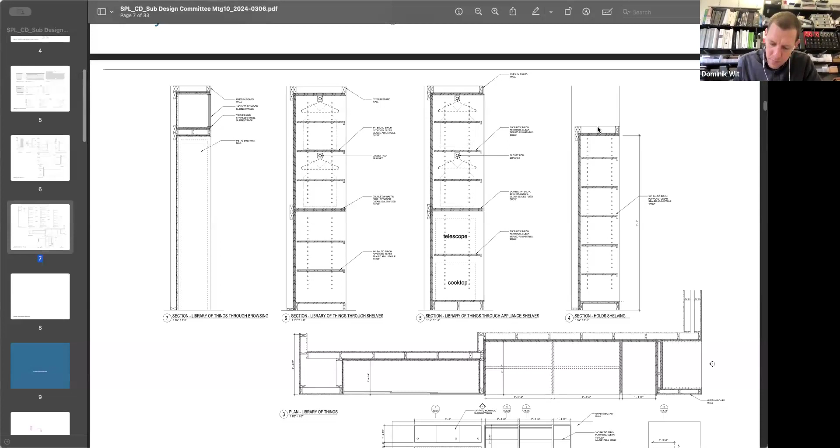I'd be happy to do that. So what we might do then is follow the section of the browsing and just replicate that. Metal shelving doesn't typically come at this custom width, so that's why I'm doing this as millwork. It would have been great if we could get this very condensed run of metal shelving and handle it exactly like browsing, but that's okay. And then a sliding door probably wouldn't work there, but just a simple door, yes.

And that's everything I have for today. So, decision making — there was an outstanding question from the group.

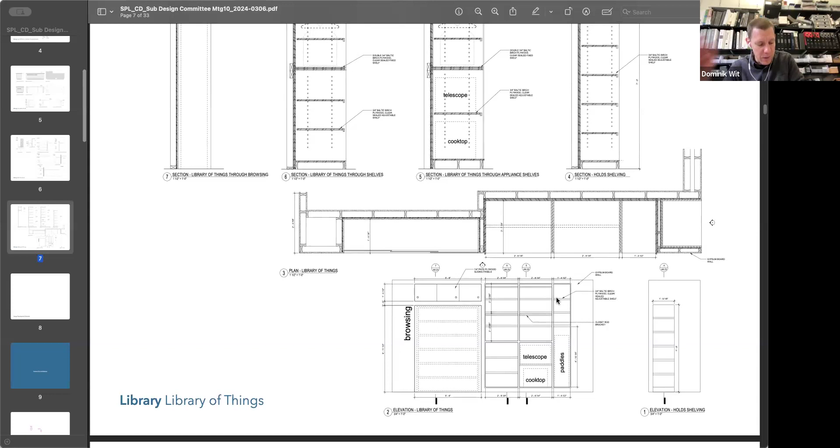Any risk of frost heave at the concrete pavers? And I got confirmation there is not. So the landscape architects are going to make sure that the sub-base materials for the pavers are going to be able to drain properly, and there's no issue with that.

I'm still tying up some loose ends on sandblasting the concrete pavers for donors to be able to engrave them. So Marianne, I'll continue coordinating with you on that.

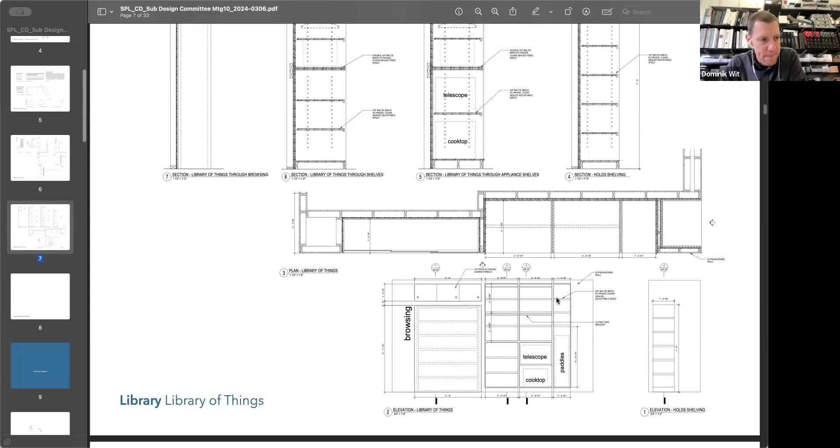Okay, and again, schedule-wise, I'm not sure why my file is not showing that this was supposed to be the schedule. Schedule has not changed. We are submitting next Friday for the cost estimate. We'll have 2 weeks to get that information back, and then the 100% is April 19th.

But so the 100%, do we send it out for a cost estimate again, or is that when it goes out to bid? That's when it goes out to bid. Okay, alrighty. So it goes out to bid April 19th.

Yes, we issue it to Neil, and I'm not sure on the timeline of when he goes live. I'm going to need it probably end of day Friday, so I don't know if he puts it out live on the Monday morning. Yeah, that'd be a specific question for Neil.

I'm not sure if I'm trying to remember again the bidding time frame as soon as we issue the set. I'm sure there's a small buffer there. It's basically a 6 to 8 week bidding process that happens thereafter. And also when 100% is done, we just need to look at it first before it goes out to bid. Once you approve, it goes and moves on. That's part of our process.

Thank you. Could you review where you're putting gutters? I thought we were going to talk about that. Oh yes, apologies, I didn't have a roof plan yet.

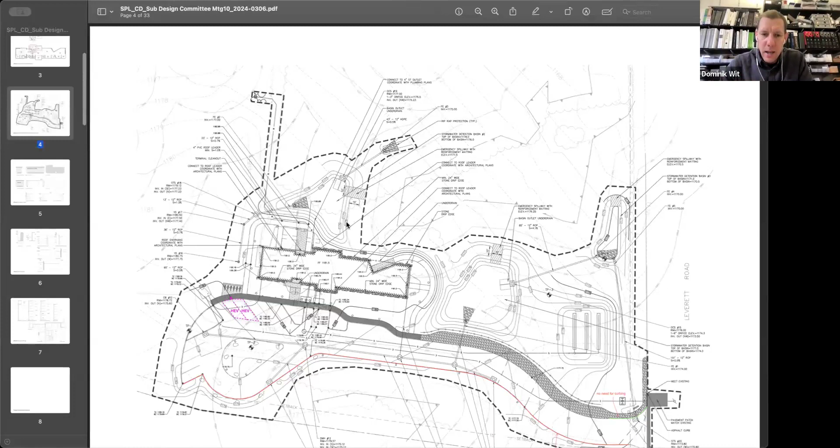We were just locking in how this all lays out.

Initially, our intent for this roof was to sheet water off, and we have a drip edge that follows most of the perimeter of the building and captures the water that is sheeting off the building.

In DD, we decided that we want to have some protection at certain egress points to the building. So we have an upturned roof on this portion here, so we don't need gutters at that location. What we're doing with this upturned roof is we're cricketing so that water sheets left and right, and we will capture that with downspouts at the corner.

The water that is caught on this side of the gable will sheet down. That which catches in the upturned roof will go to these 2 leaders, and everything to the left here and everything to the right will sheet off to a drip edge.

The north side and the south side will not see water runoff. We've got a standing seam metal roof, so the intent is that these vertical seams capture the water and direct it either east or west of the gable pitch. So this egress door here does not need additional protection exiting.

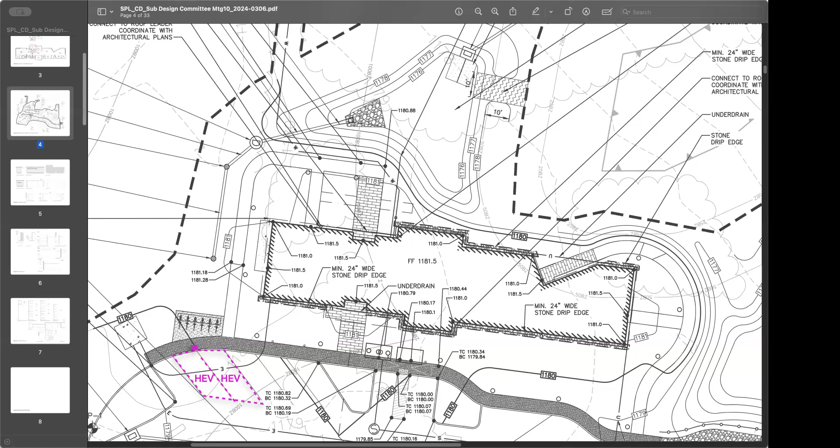Were there any other questions? Stephen? Has Garland commented on the interface between the TPO and the metal roof, on the upturned roof?

They have, and they were happy with that, but we've just initiated a coordination effort with our envelope consultant, SGH. It's been a little slow getting them on board, but we have an agreement with them, and we're consulting with them specifically about that. Stephen, I'm hoping to have that turned around for the 75%. I've asked them. Our office feels that it's...

Excuse me, the building I'm in has just been issued a request to evacuate, so I'm going to leave the meeting now. No worries, good luck, Stephen. Thanks.

Oh my. I hope everything's okay over there.

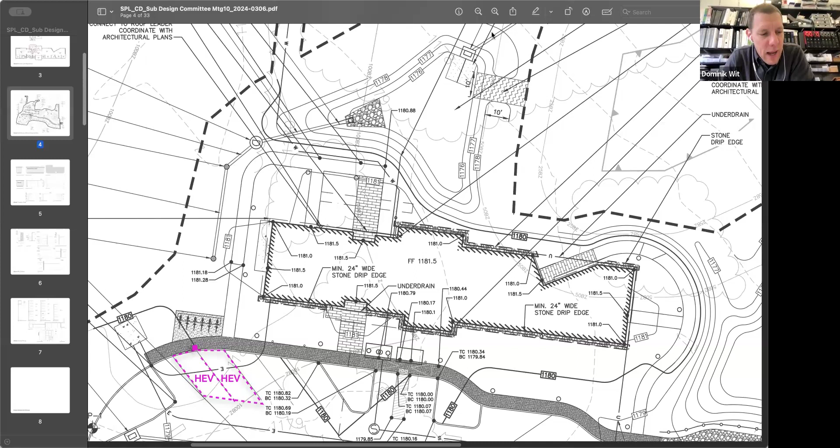So to Stephen's question, I don't have an update to present yet as to SGH's input on that detail, the upturned roof. In the ongoing conversation with the committee and our office, we felt it warranted engaging SGH to get a third party to critique that detail. Once we have all of that, we want to present it to you.

I've asked that we get that from them by next week, so I'm not sure when we can have the information. It's been slow going, as I was saying, to get them on board. We've been pressing them; we're hoping to have it before that. Obviously any outcome from that is going to roll into the 100%, but we felt you guys deserve that information. So that'll be a third party, not just Garland, our initial consultant, but a third party again to critique that. As soon as I hear more, I'll provide information about the TPO transition to the metal seam roof.

Dale? Just a quick question about the gutters themselves. I assume we're talking probably a 5 or 6 inch gutter, commercial size. I'm thinking, since it's going to be associated with a metal roof - I never used to believe in gutter guards, but I sort of do now - and I'm wondering if that's a possibility in an installation like this.

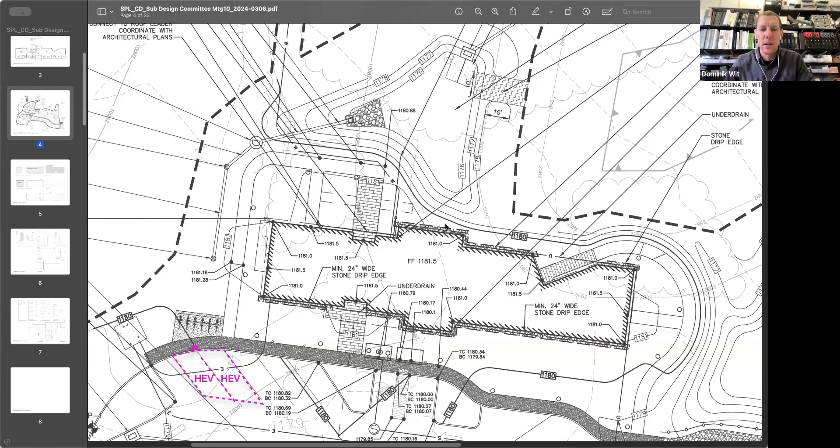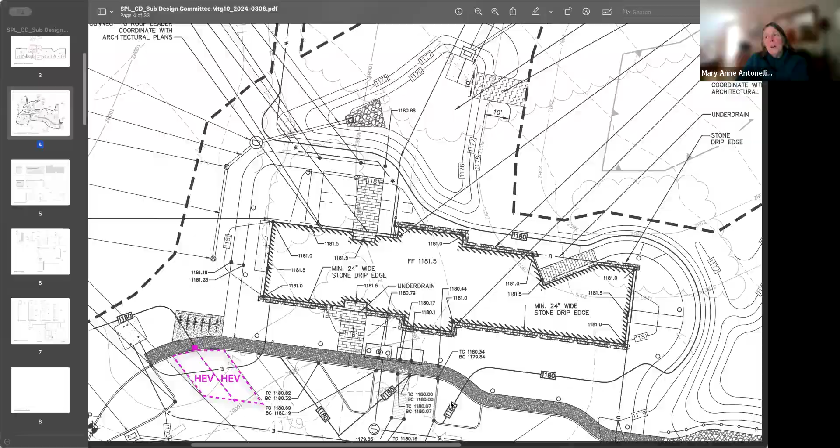Marion, I think we had a committee meeting allotted for next week. So we do have a full building committee. There's something we need to vote on - funding some gravel that needs to be put down for the well driller to get out to the site. So we'll go ahead and meet on Monday anyway.

If you don't need a decision, the other thing was we were going to have a discussion as a committee about the flooring in the entryway and circulation area, lobby, reception, browsing. But if it's easy enough to just price out the rubber flooring and tile flooring, we can make a decision with those numbers. Even though I think we have that pricing already. We do, yeah, but maybe to be a little more specific on the tile.

Okay, but we can talk about that without you, and we can make the decision about the gravel needed for the well installation without you. So I don't think there's anything that you need to be there for.

I think if I do have some new information, for instance from SGH potentially, or the restroom configuration - we have a good handle on that, at least for 75%, and we have a bit of time to tweak things again, once we get the actual well information to lock in all of that. So I don't think there'll be anything specific from me at Monday's meeting.